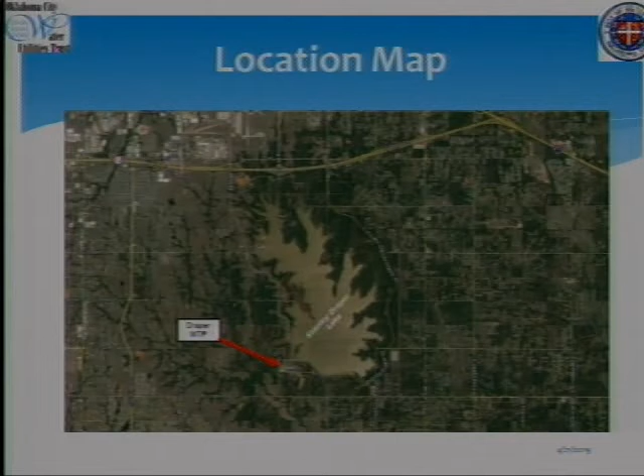Chairman and trustees, thank you. I appreciate this opportunity to give you this report. The Draper Water Treatment Plant is located on the southwest location of Lake Stanley Draper. The Lake Stanley Draper Water Treatment Plant is becoming one of the most important water facilities in the city, and it supplies approximately 2/3 of the city's population.

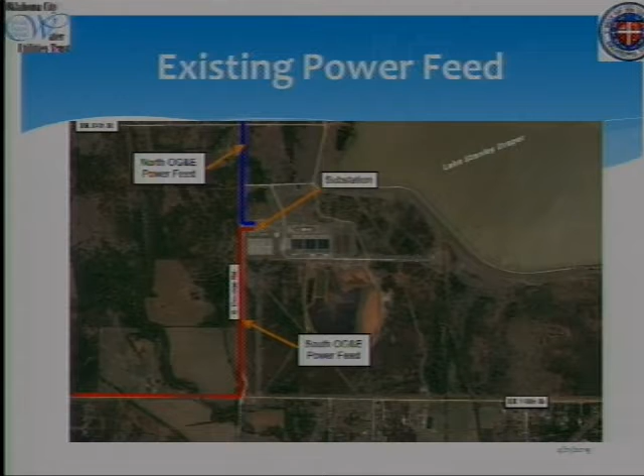Currently the existing power feed from OG&E is fed by two substations, one from the north and one from the south, so we actually have two separate feeds coming into the plant. What we've noticed is over the last 8 years, a total of 61 drops or surges have occurred, and these ranged anywhere between a few minutes and even up to 8 hours. And so the reliability of service has decreased over the years.

And every time we lose power over at Draper, of course, the water supply decreases and the pressure decreases in those areas, those service areas. What this has led to is we're all excited about the FEMA grant application that we received for the $24 million generator program and for the electrical distribution system at the Draper Water Treatment Plant, and we're excited about this project, and it is anticipated to be completed in December

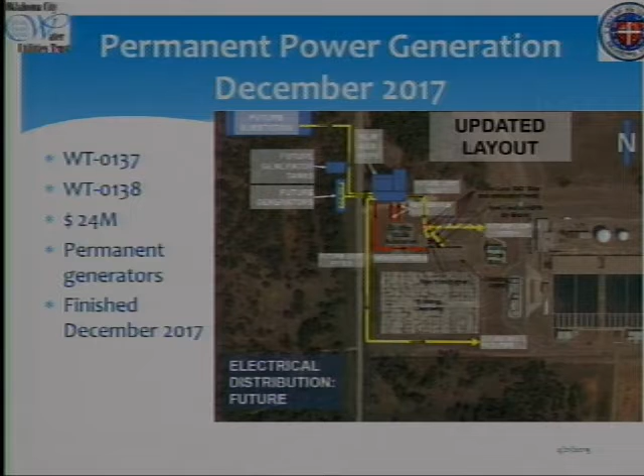2017. And so with that, what that leads us to ask is what do we do in the next 2 years? What are our options in the next 2 years until this power generation system comes available and comes online? Dustin, what kind of generators are we putting on site? What we're doing is they're natural gas and diesel fueled because of the regulations, and Sam, you can correct me if I'm wrong, because of the regulations of the exhaust. We're leaning towards the diesel generators because currently the regulations of the bi-fuel diesel and natural gas generators, the Tier 2 and Tier 4 requirements, they haven't quite got set, so we're leaning towards the diesel generators.

Okay, I would have assumed that the emissions would have been less with a natural gas generator. I mean, and that's fine. I just knew that there are issues in some communities using diesel backup generation because of the air emissions, and I didn't know if we'd had to deal with that or not. No, that was the thing with the natural gas generators, with the requirements and everything, and the FEMA grant money. They're still bi-fuel, right, but they're going to be mainly run off of diesel with the option in the future to be able to run off different gases. It was hard for the competitive bidding to have the manufacturer supply that technology since it's newer. Sure.

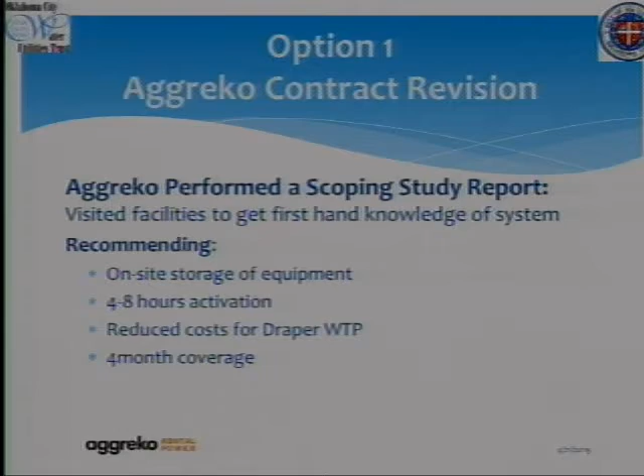So what we did is we met with Aggreko and discussed with them, and they performed a scoping study report. With that scoping study, they visited 20 sites, including the Draper and Hefner Water Treatment Plants and also all the booster stations in the city. And they did an analysis of the system to see exactly what types of power and equipment they needed. And the recommendation they came up with to help reduce the cost is to have on-site storage of the equipment, meaning that we would rent the equipment and have it in place on the site at Draper or Hefner, and that reduces a 1 to 2 days activation to 4 to 8 hours activation. So when I call them to activate it, they would come out, hook up the generators, and we'd be back serving water in 4 to 8 hours.

And also the reduced cost: since we're actually renting the equipment on a longer-term basis, the rental cost has actually come down. However, it's only for a 4-month coverage fee because we picked 4 months to get us through the stormy season, whether that be in the spring or in the summer, or in the winter, I'm sorry.

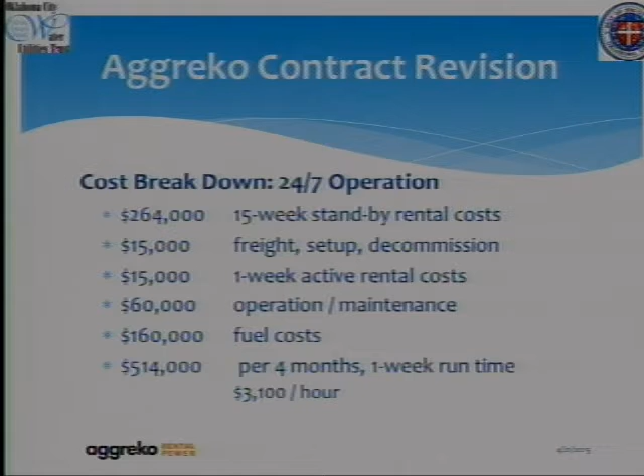The cost breakdown on this next slide kind of shows you the rental cost, the freight and everything, the fuel cost. And so for 4 months of service, if we have to run it for 1 week, again, this is 1 week for 24 hours, it would cost approximately a little over $500,000 to be able to run this equipment. And again, this is still 24 hours, 7 days a week, and only the power for one treatment train. So you're still supplying the same amount of water for that.

So some of the advantages of this is the equipment is on site. We're guaranteed to have it. It's a 4 to 8 hour activation time, so that way we can get up and operational more quickly and more reliably. And also, we're not relying on overhead power lines, because most likely in a storm event, power lines may or may not be there. And so with the generators on site, to be able to hook it up, we don't have to rely upon those.

So of course, the disadvantage is it's like an insurance policy. If we don't use it, we're still paying approximately $300,000 for 4 months of coverage. And if we want to have coverage in the winter season for an ice storm or anything like that, then it would be double that, so almost $600,000 to be fully covered in the case of a storm event, even if we don't use it.

So, can I interrupt you a second right there? Yes, sir. What do the statistics show about interruptions during the winter as opposed to spring storm interruptions? I'd have to look through the data, but from my recollection, it happens more during the spring and summertime, because of the demand on OG&E and the winds being intermittent, and because the last few years the winters haven't been as bad as summer or springtime. But I don't know exactly off the top of my head.

But the cost of coverage in the wintertime would be the same? Correct, sir. It'd be the exact same, because what we're paying for is the ability to have the equipment on site for that 4 months, and then if we ever had to activate it, you would add the fuel cost, and the rental rate actually decreases, but you add the fuel cost and then the maintenance and service on that as well. Because during the time it's running, Aggreko will come out and service it and maintain it and keep it full of fuel and everything, so the city staff does not have to worry about it operating.

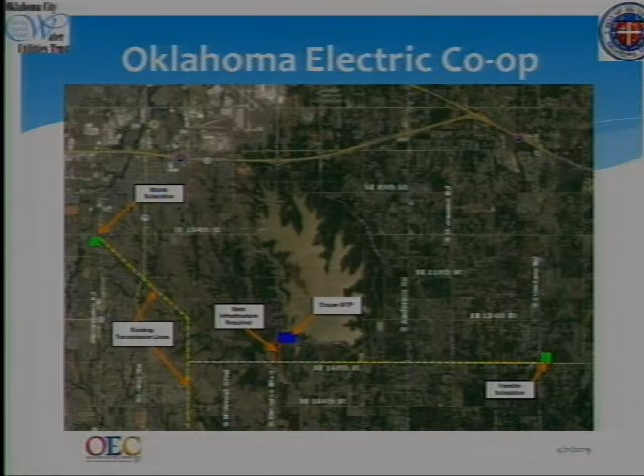There is some infrastructure that we would have to pay for upfront, and that's approximately a $100,000 investment. That is to lay overhead power 3,100 feet from Southeast 149th Street, from their main transmission lines up to the plant area. So that would be an investment that we would have to incur to get this power to us. So that's a small investment on our part.

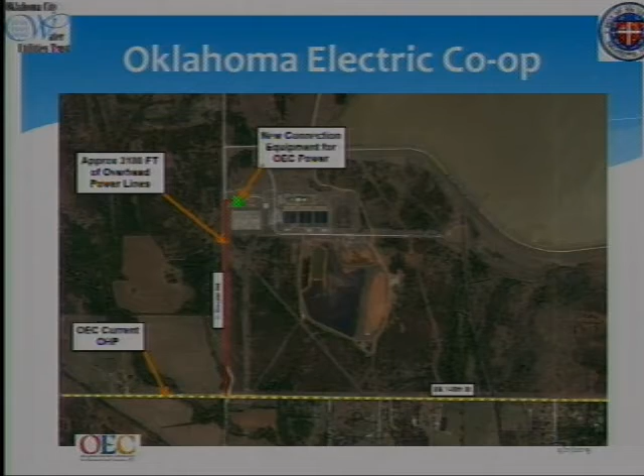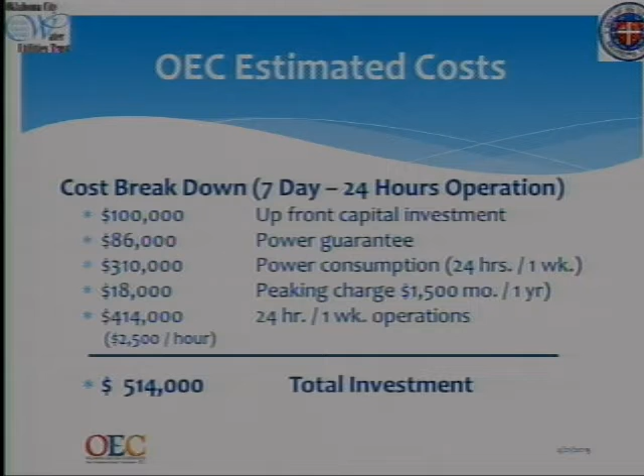So with all the fees included and everything, it's still about the same as the Aggreko revised pricing contract. It's about $100,000 less if you take out the capital investment for running. The advantage of this is you actually have full year coverage. You have 365-day, 24-hour service. It's a separate source from OG&E, so if something happens with OG&E, their substations or anything, we have an opportunity to be able to keep the plant online.

And it's also affordable. It's a lot more affordable to be able to run, just to maintain it. And also, if you're not running the system, then it actually costs less than the Aggreko contract. But again, the disadvantage, of course, is we're relying upon the overhead power lines. It's a good thing if the overhead power lines are there, but if a tornado comes through, it's a 50-50 chance that the power lines may or may not be there to be able to operate this.

So, in summary, if there's no event, if we just leave the equipment, the rental agreement, the revised Aggreko contract for 4 months coverage, is about $280,000. That's just having the equipment on site just in case something happens. An insurance policy, you might want to think of it that way.

And OEC pricing is $86,000. That's just for that power reservation to guarantee us when we need it, they will be available for us. So that way they can hold their infrastructure. So if they get more customers on their system, and if they have to upsize their infrastructure, we will still be allocated the demand load that we require.

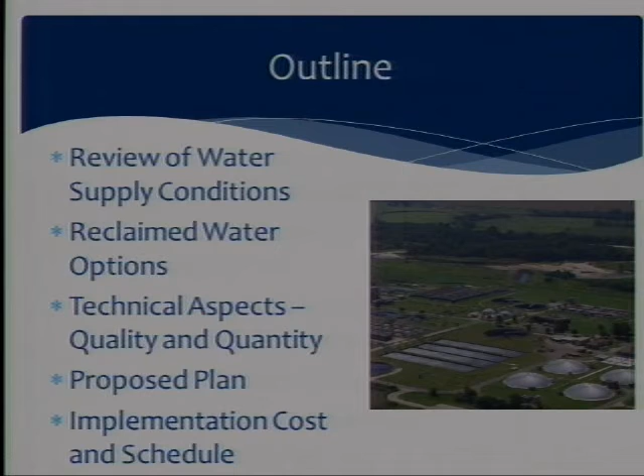The difference between what we saw in 2012 and 2013 compared to today is the Canton Lake levels probably weren't as low at that point in time as they are today. They've been reduced for a number of years now. So

the reclaimed water options that we looked at as part of the overall feasibility study were really threefold. The first one was water supply augmentation, looking at taking wastewater from the various wastewater treatment plants on the north side of town and bringing that over to augment the supplies at the Lake Hefner water treatment plant. I do want to point out that water reuse and use of reclaimed water is not something new for Oklahoma City.

You have been doing and practicing this since 1997. In fact, last year, Oklahoma City reused 2.3 billion gallons of reclaimed wastewater for non-potable purposes. That represented about 11% of the entire treated effluent that was discharged to the creeks and rivers. So that leads the state as far as I know. So I think Oklahoma City is to be commended for that.

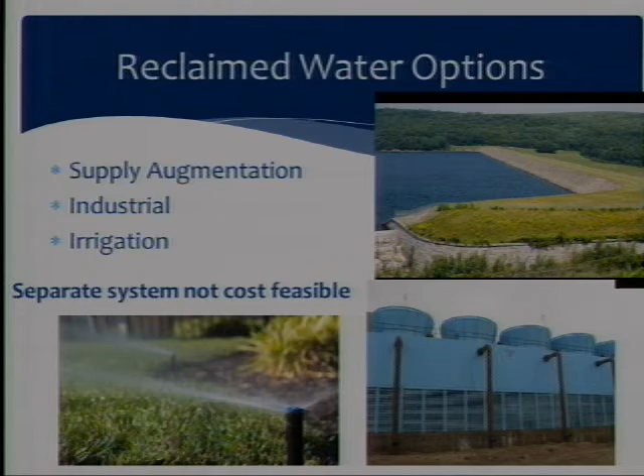We did look at building a separate system to take reclaimed water to some of the non-potable water users throughout your community. And because of the proximity of those uses to where your treatment plants were located, we determined that was probably not feasible at this point in time. And we really focused our efforts on looking at different methods to supplement reclaimed water use in Oklahoma City. So with that, I'm going to turn the presentation over to Gary Hunter, our senior engineer.

Thank you, Mr. Chairman. Trust, again, I'd like to thank you personally from Black & Veatch for the opportunity to present today. This has been a very challenging project for us from a process standpoint and a very rewarding project. And we'd like to thank staff for all of their input into the project.

I get to visit with you a bit more about the technical aspects. The first we're going to talk about is the quantity of water that would be available as we look through different sources throughout the community. As Kurt mentioned, finding and meeting a key water supply demand is critical for the northern part of the city. This also had to be both economic and viable as a source. We looked at a number of alternatives throughout the area to look for those water sources.

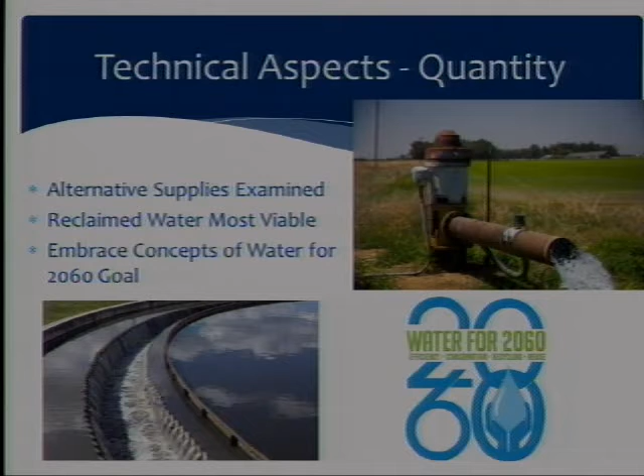And a review of those sources included the source itself, the ability to bring water into the system, and the water rights that might be associated with that water. After we looked at all of those, the most viable source was the reclaimed water from the wastewater treatment facilities. This embraces the concepts of the state water plan, the Water for 2060 goal. And if you look at that in terms of recycling and reuse, it keys in on those two key components of the plan.

The other technical aspect that we needed to look at was what would be the constituents within the water that we would need to remove to make this a key water source. The three up here are the pathogens and microbial removal that we would need to achieve, and low concentration constituents. We show the picture here of caffeine. There are a number of those low concentration constituents out there, and the list is growing. And so we wanted a robust treatment process that would be able to remove those constituents.

The other issue is salt. As we continue to reclaim and reuse, we end up seeing a buildup of salt, and we wanted to address that particular issue. The other key aspect of this project was barriers, providing multiple barriers within the system to be able to provide this reliable water source. Oftentimes we see those as being environmental in nature through the discharge of effluent into lakes or rivers or other receiving bodies, and then letting natural attenuation take its course.

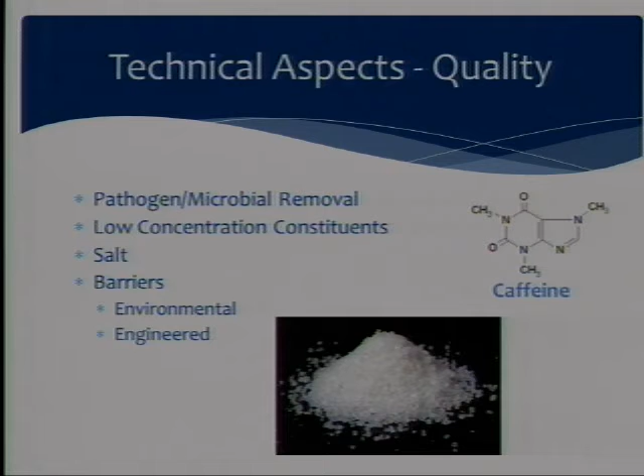Throughout the study, we also looked at engineered barriers, mechanical equipment that might potentially be used to provide those additional buffers. And so I'll share a little bit about some of those here. So to address the quality issues, we looked at three different process trains, looking at microfiltration, reverse osmosis, and advanced oxidation.

I will say this is the traditional train that if you look at reuse facilities in Arizona and California, this is the path that they tend to take. It addresses all three of the key components that we were looking at in terms of water quality: pathogens, low concentration constituents and salt. And so that was one we looked at.

Recently, through research, literature and other studies going on in terms of reuse, two other alternatives have come forward in terms of the potential for being able to be applied here in Oklahoma City. One of them is ozonation, biologically activated filtration, and high-level UV. This is very similar, actually, to the treatment process that is at the Lake Hefner Water Treatment Production Facility today.

So that ozonation, biological active filtration, high-level UV takes care of the low concentration constituents and the pathogens, and then we're left with salt. One of the things that the study looked at is how salt would be recycled and what levels we'd have to deal with. We're still doing some ongoing study looking at those particular constituents and how salt would be built up, but looking at it as a viable option.

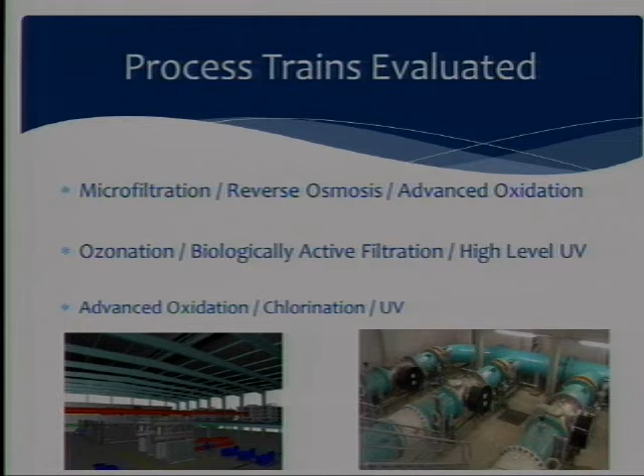Moving forward in terms of availability, our first project identified throughout the study would take reclaimed water from the Deer Creek Wastewater Treatment Facility to Lake Hefner. This would provide around 13,000 acre-feet of water currently in 2015 to supplement the lake. Forward-looking in 2060, there would be about 20,000 acre-feet of water. We would look at providing advanced wastewater treatment facilities with ozone, biological active filtration, and high-level UV. A pump station pipeline would be constructed to convey the water from the Deer Creek facility to Lake Hefner. Chlorine would be added to that pipeline, and then dechlorination facilities and reaeration at Lake Hefner.

I want to drill in and look at this particular picture. This is actual water from a facility in Melbourne, Australia that implemented ozone, BAF and UV, and you can see how clear that water is compared to tap water. So it essentially offers us a comparison of what we would be looking at as we move forward into the future.

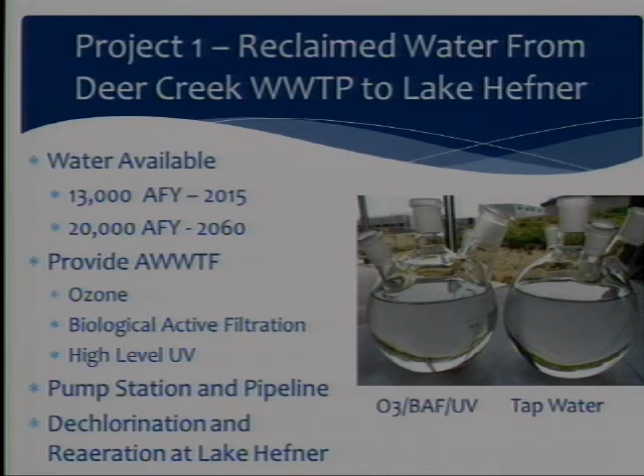So Gary, you're basically setting up a small Hefner at Deer Creek, because we've got ozonation, we've got biological active filters, we don't do ultraviolet, but we do chlorination, so it's just a different type of disinfection. Correct. So you're basically setting up a small Hefner plant on the back end of Deer Creek, and then you pump it into the lake. That would be a correct statement, Mr. Couch. Okay. That's what we would be doing at this point, to address these particular constituents, and we would have to look at salt in the future as well.

This shows the outline of the pipeline. This would be a 42 to 40-inch pipeline from Deer Creek down and around to the confluence of Hefner Canal into Lake Hefner. We chose this location mainly to allow as high a level of mixing as we could. So Lake Hefner in this particular case would become the environmental buffer. And it's about an 11-mile pipeline.

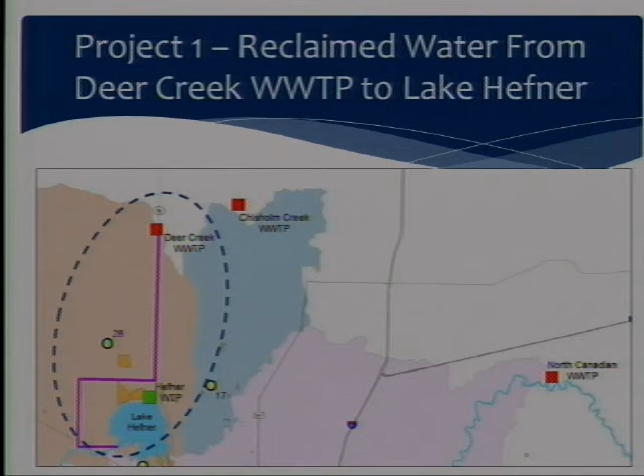Project 2 would look at tying in the Chisholm Creek to Deer Creek. That would provide us about 9,000 acre-feet today and about 12,000 acre-feet in 2060. If you add up the 20,000 and 12,000 acre-feet of water in 2060, that essentially provides the difference we were looking at; the deficit at Lake Hefner today is about 20 to 30,000 acre-feet of water a year. So essentially we believe that through this we can provide a fair amount of the deficit in the Lake Hefner watershed currently.

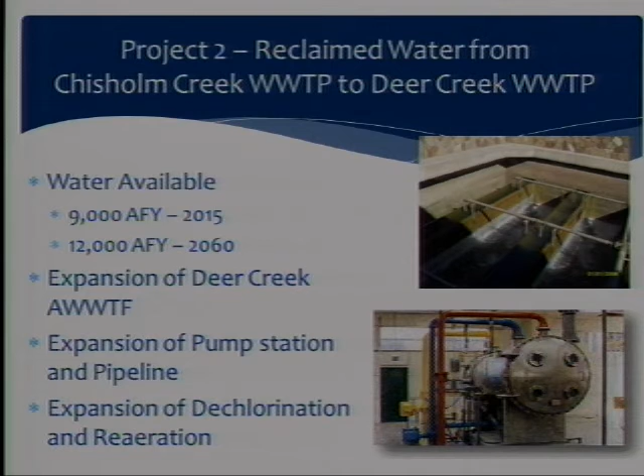This particular project would expand the Deer Creek wastewater treatment facility, with expansion of the pump station and expansion of dechlorination facilities, and essentially mirror what was going on at the Deer Creek facility. This would be a 4-mile line from the Chisholm Creek plant to the Deer Creek plant, and it's about 36 inches in diameter.

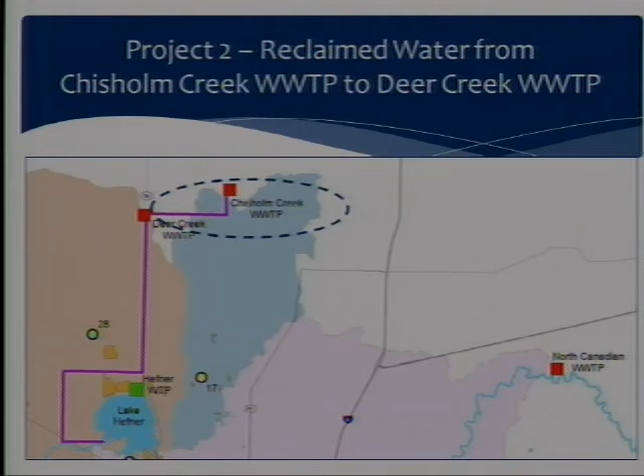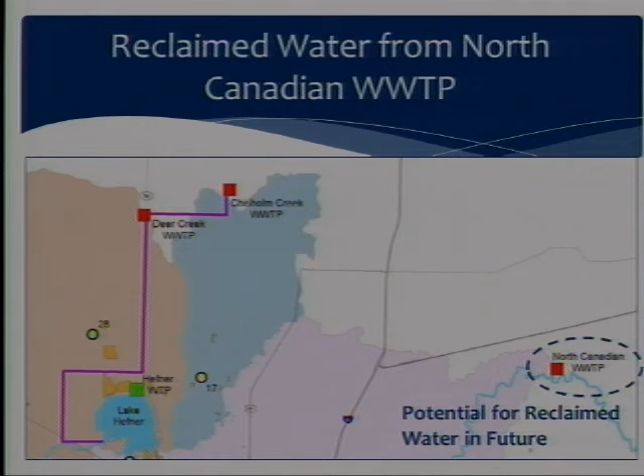Going into the future, if water levels continue to drop, the option is available to bring water from the North Canadian wastewater treatment facility across town to Lake Hefner. This would require a very large pipeline, 72-inch in diameter and about 20 miles long. So while the water is available, we would recognize very quickly that would be a very expensive pipeline to move

that water. To offset those costs, we looked at what is known as scalping plants. These are small reclaimed water plants, usually membrane in nature, membrane bioreactors, so we have membranes in the biology system to essentially decrease the footprint of the facility. They're generally located near high water users, so they're strategically located to allow that reclaimed water to be used coming off the facility. As we looked at that, moving forward with scalping facilities, it would be a function of customer demand as well as outside economic involvement.

Just to give you some feel, the picture in the lower left hand is actually a scalping facility located in the Atlanta area providing water to golf courses, and the one on the bottom right is actually located in the Phoenix area with an MBR facility. So a lot of water restricted areas are looking at these MBR and these scalping plants to provide water to industrial customers without essentially the construction of very large conveyance facilities.

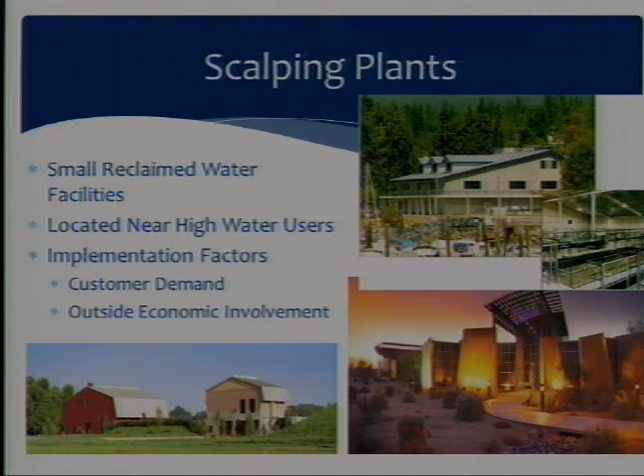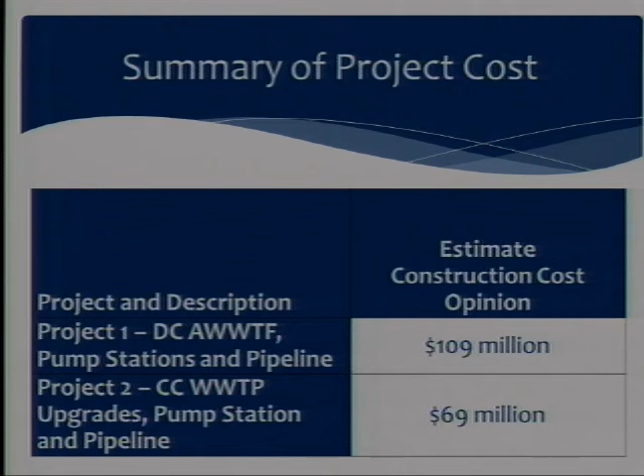So just to give you a feel of those projects, and this is the construction cost, to take the water from the Deer Creek new advanced wastewater treatment facility, the pump station pipeline would be approximately $109 million in terms of construction. There is a typo in your minutes. The project construction of facilities going from the Chisholm Creek to the Deer Creek would be approximately $69 million. I believe it's somewhere in the $89 million or so in the agenda that came out. So there is a typo there, if you could make note of that.

So our recommendations going forward, we believe in terms of the cost, the ability to move ahead with the Deer Creek, Chisholm Creek reclaimed water, moving it over to Lake Hefner would be appropriate, and one that we would recommend to the trust to consider. Part of that particular study would be to be able to work closely with ODEQ. Many of those folks are here today. They are working very hard in terms of the establishment of water reuse, both indirect as well as direct potable reuse regulations, to cover what we are looking at in terms of moving forward with Lake Hefner at this point in time. So we would work very closely with ODEQ as things move forward.

Because a number of these technologies that we are looking at are sort of, I won't say new, but not very well applied around the world, we would recommend conducting a demonstration study to verify and validate what has been done other places and move forward with that. We'd also recommend visiting other communities. There are a number of communities actually in Texas that have been down this path that we could probably gain a lot of information from.

Part of this would be to expand our monitoring program. There's a lot of constituents that we would need to know more about, salt being sort of the pinnacle of that, essentially looking not only at the receiving streams but also the wastewater treatment facilities in terms of monitoring, and developing a public outreach program that would convey the message of reuse to our constituents here within the Oklahoma City Water Utility Trust.